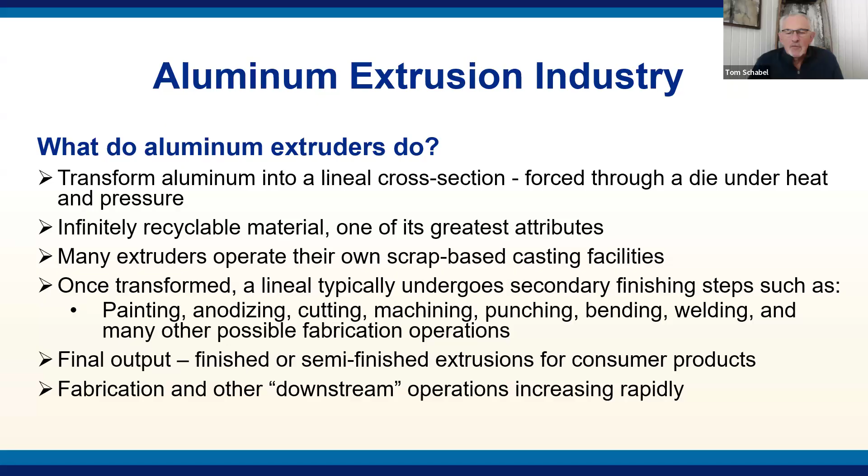Beyond extrusion, our industry does a lot of things. It takes that extrusion profile and paints it, anodizes, cuts, machines, punches, bends, and does many other fabrication operations. Our final output is a finished or semi-finished extrusion for consumer products that you see or use every day. Our industry is growing beyond just the extrusion process into many downstream operations, which increases our need for a talent pool with higher skill levels throughout our industry.

I'm going to show you a video here. If you could run that, please.

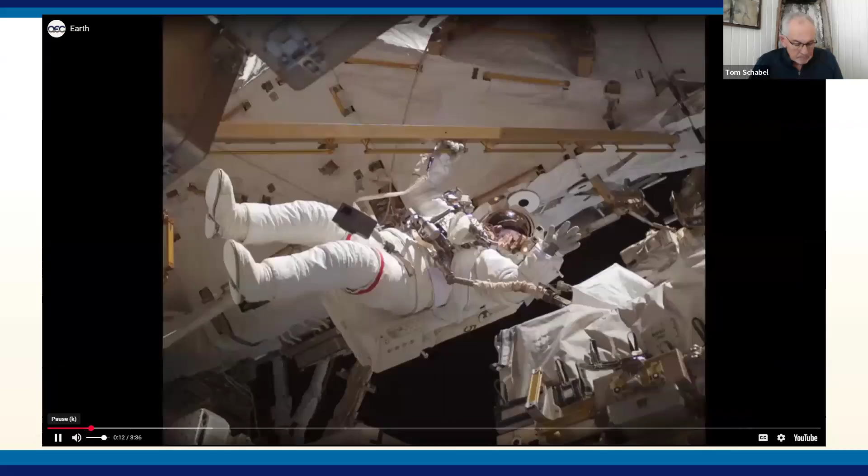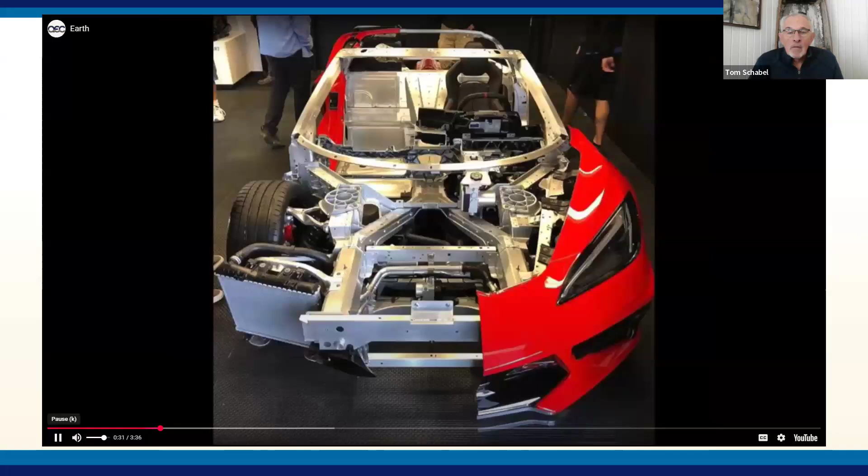You may not know anything about aluminum extrusions, but they play an important role in and out of our world. Strong, lightweight aluminum extrusions are important elements of the International Space Station, helping to provide a new vista of our world. They help us get around too, providing frames for bicycles, trucks, and trailers, and various components of cars, pickups, and SUVs. Lightweight extrusion-based battery boxes help electric vehicles go farther, and extrusion structural components reduce weight in cars and trucks, improving fuel economy and reducing their environmental impact.

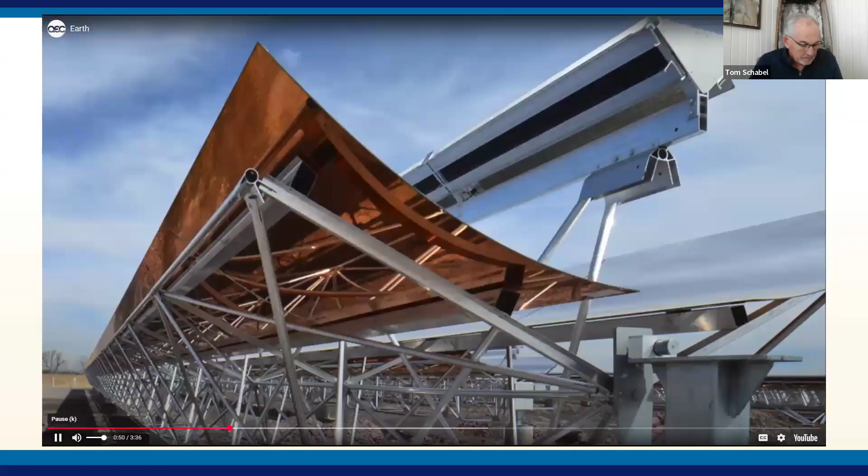Extrusion-based window framing and other building components help reduce energy consumption in buildings while admitting more natural light, further reducing energy demand. Extrusions don't just help with energy savings, they help in energy generation as well, providing lightweight mounting systems for solar power installations. You'll find extrusions in a multitude of other products you use every day: furniture, bridges, lighting and industrial equipment, sporting goods, and bleacher seating.

Extrusions are the basis for your cell phone's case. They form heat sinks that keep your laptop components cool, and they're in amplifiers that keep our concerts loud. Extrusions make so many products lighter, more efficient, or more attractive, all while being kind to our planet.

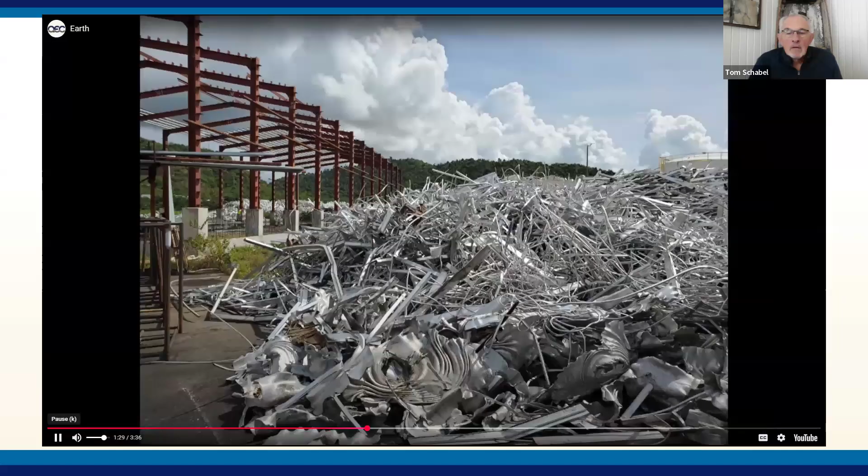Aluminum is the third most common element in Earth's crust, but most extrusions start from aluminum building scrap, old wheels, wire, and industrial scrap. This year, North American extruders will recycle nearly 4 billion pounds of aluminum scrap into new products.

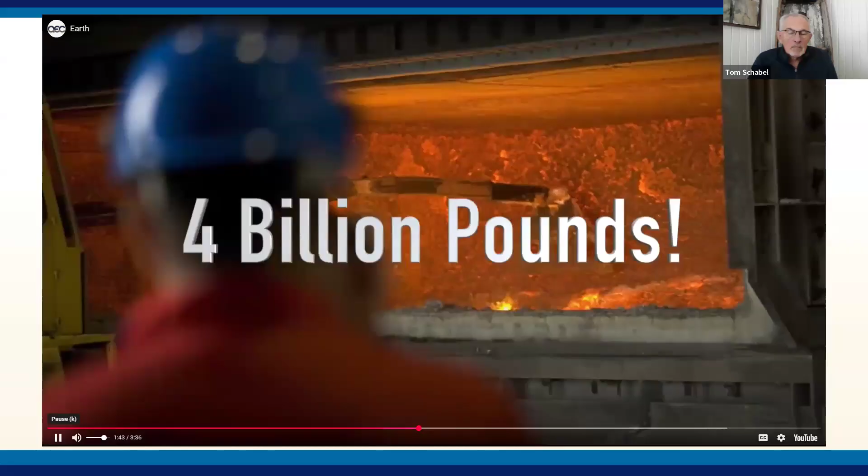That scrap gets melted and cast into logs that look like aluminum telephone poles. Those logs go to over 200 aluminum extrusion manufacturing plants in North America, where they are heated and pressed through a die, creating a shape engineered for a specific application, kind of like a Play-Doh press, but with 4,000 tons of pressure. Those shapes are cooled, straightened, and aged to give them the necessary strength and hardness.

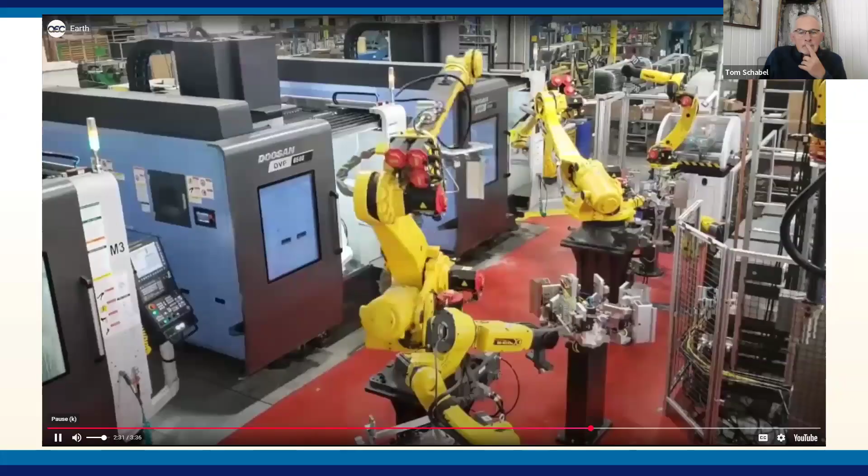Then they are cut, machined, bent, welded, painted, or anodized to produce the parts that will go to the company that will build the window or vehicle or treadmill or amplifier. Making that all happen precisely on time takes people like you to engineer the parts, verify quality, program the robots, drive the press. There are a host of good-paying jobs that require some mechanical aptitude and high school or community college training, and can lead to a rewarding career.

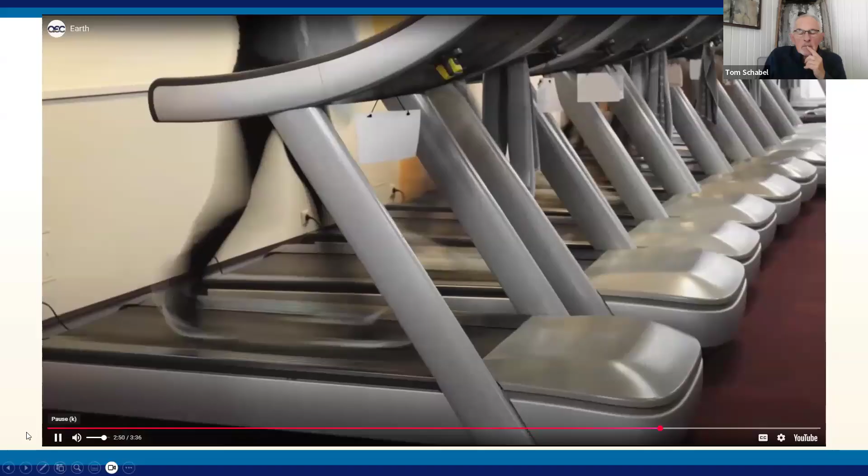Aluminum extrusions make our world better and shape meaningful and rewarding careers. To learn more about careers in our industry, go to aec.org/careers.

Thank you. You can see that we participate in lots of different products and markets. As an industry, the Aluminum Extruders Council has 70 companies with over 200 plant locations. So wherever you're looking for a job or a place to land, we probably have a member with a facility near where you want to be.

Our industry employs over 60,000 employees among our extruder companies, and when we pull in our supplier base into that, well over 200,000 employees across the US and outside. Our annual growth rate as an industry is 4% annually and growing. Certainly the automotive market is a significant growing market for us, as well as solar and a number of others. If you look at our map coming up, you'll see that our extruder members are located in 30+ states.

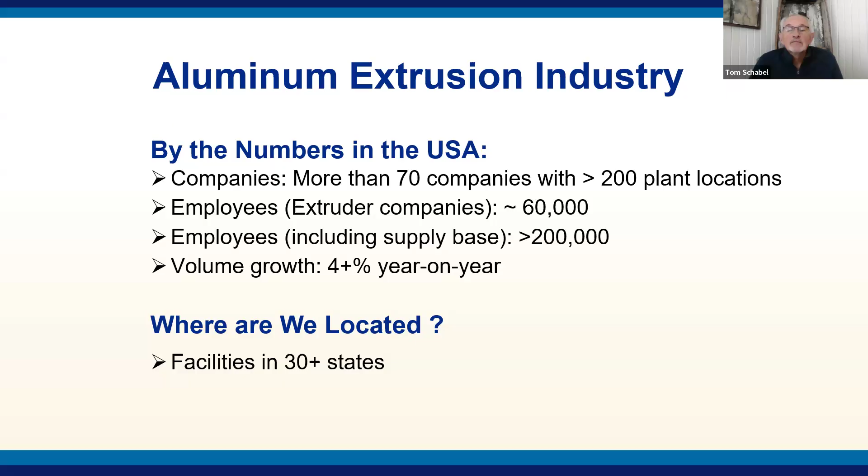We love the vets. We appreciate the service, the training, the discipline, and the leadership that is developed in each and every one of you through the military. We would love to be a place within our industry that could offer opportunities for you as you exit the military. Thank you.

Markets we serve. These are just a few of the markets we serve. The great thing about aluminum extrusion is that it's so versatile. It can be used anywhere.

Typical markets would be in building construction. Commercial buildings, high-rise curtain walls and windows, storefronts, skylights. You go into a mall and you're probably going to walk through an extruded door. Residential windows, doors, skylights, pergolas.

Certainly institutional: hospitals, schools, government. If you happen to be in a hospital going through some tests or a procedure, if you look up, you're going to see an extrusion somewhere on your CAT scan machine, MRI, or the table you're laying on.

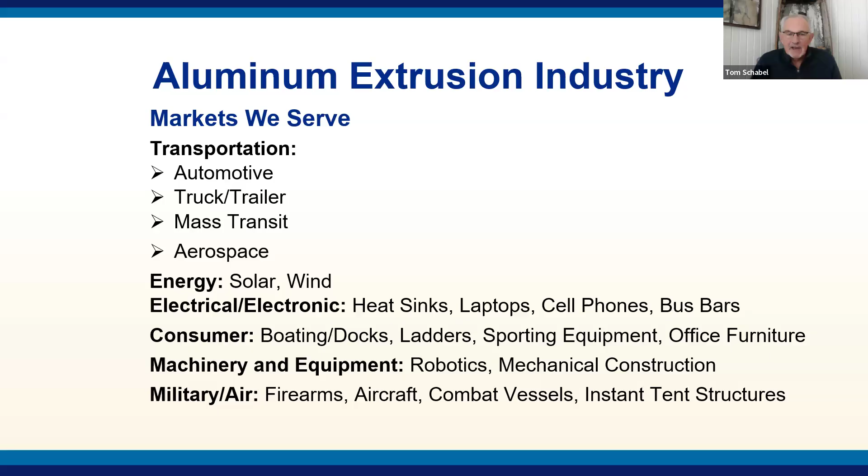So what do we need? We need people of high integrity, disciplined, and focused. But beyond that, PLC programmers and maintenance people, absolutely. Every plant represented today, I'm sure, is looking for some.

CNC programmers for machining and other downstream operations, maintenance technicians, quality managers, production workers, technicians, welders, forklift operators, logistics, leaders, purchasing, sales. We are manufacturers, but we have to support what we manufacture to the customers we serve.

So we would love, and our members would love, to talk to you about what you would like to do. What would you like to become after your years in the military? We'd love to be a part of helping you develop that.

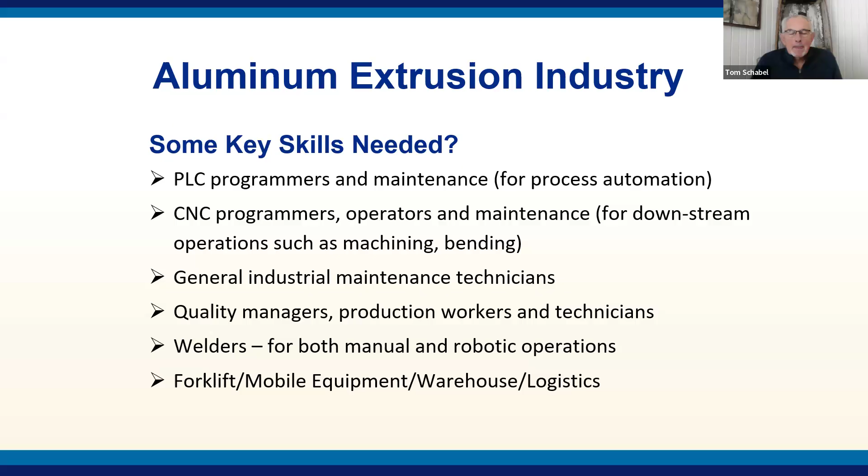We go to your shows. I was at one not too long ago where I got to meet a lot of great people who are exiting. So we'd love to have you explore what the aluminum industry has to offer. With that, I'd say thank you.

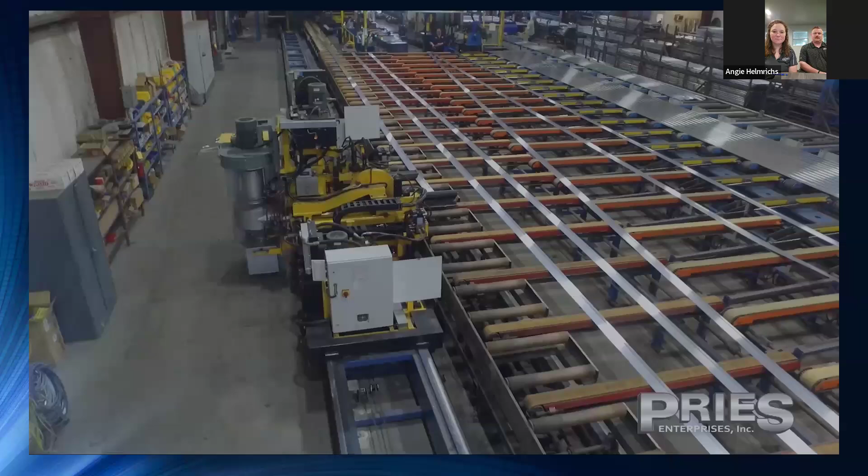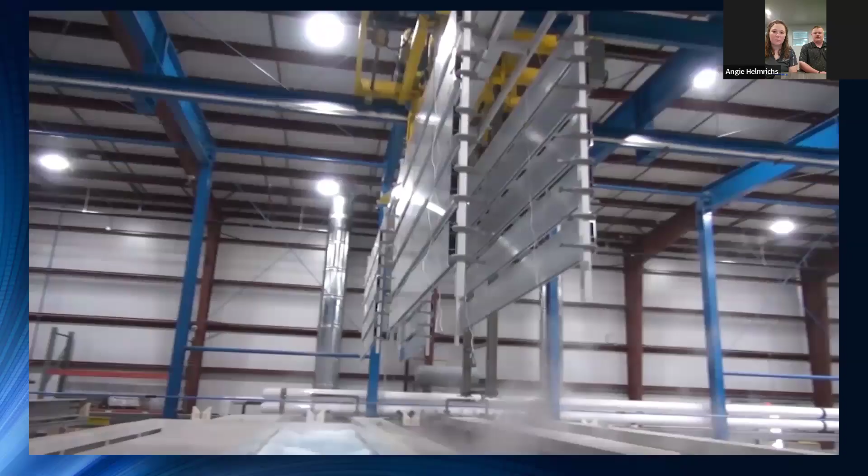This is the current video of one of our 8-inch lines. As I stated, we currently have a 7, 8, 9, and 12 inch. Our 8-inch did just go through a large upgrade. We do a lot of massive upgrades on all of our presses to improve ergonomics for our employees, increase productivity, and make our employees' jobs more enjoyable and easier.

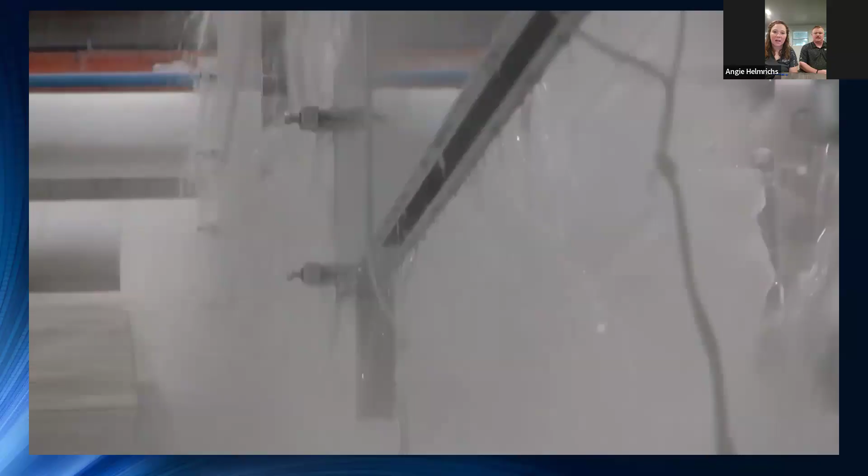This here is our anodized line that was brand new in 2019. As I stated, that's a state-of-the-art line. It was the first fully automated line in the country for anodizing, and we are pretty happy to add that to our capacity here at Prees.

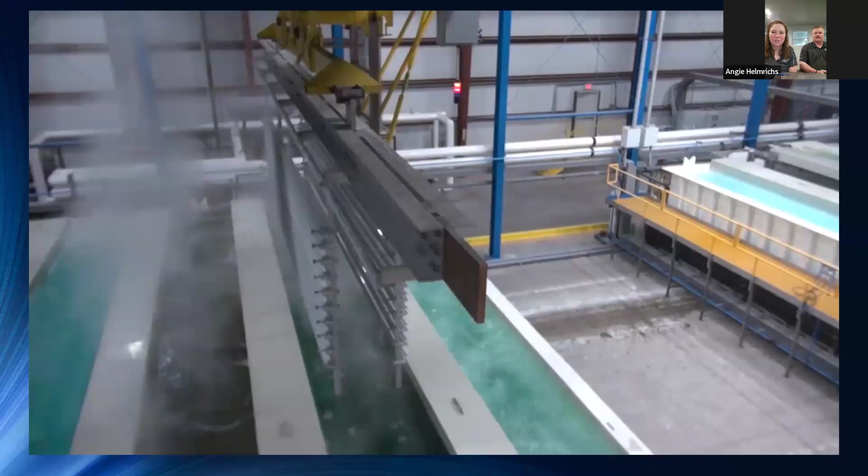As Reese had stated, he's been with the company about 7-ish years, and so have I. Since we have grown, we've added over 100 employees since I started. So we've really done a lot of advancement here at Prees.

So we do have a lot of opportunities. I know from my standpoint, not just Angie's as HR, we do a quarterly profit sharing for all employees - a quarterly bonus that comes with any sort of metrics that are met. It's an extra chunk of change in our pockets that we see each quarter.

It is nice that we take the day, we sit down, we do have food that's usually in place for us. We go through how our last quarter went with all of our numbers. It's nice to actually sit down, take a break for the day, see how everybody's doing in the different departments, and get where we're at with that quarter moving into the next.

We do have bi-weekly pay periods with a $2 attendance bonus, shift differential for second and third shift. There's 401k matching. We have health, dental, and vision insurance, long-term and short-term disability, an FSA for health and dependent care. We do a PPE reimbursement for things like steel toes.

We do have a kids back to school program that Angie runs, usually at the end of every semester, or for sure at the beginning of each year.

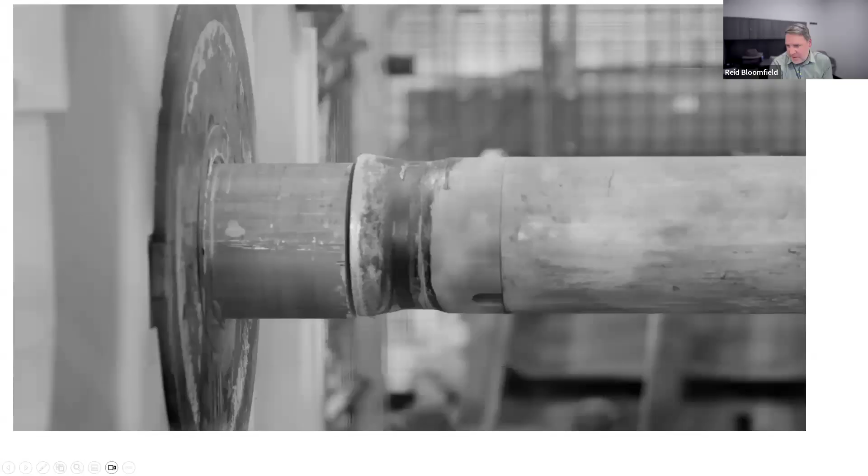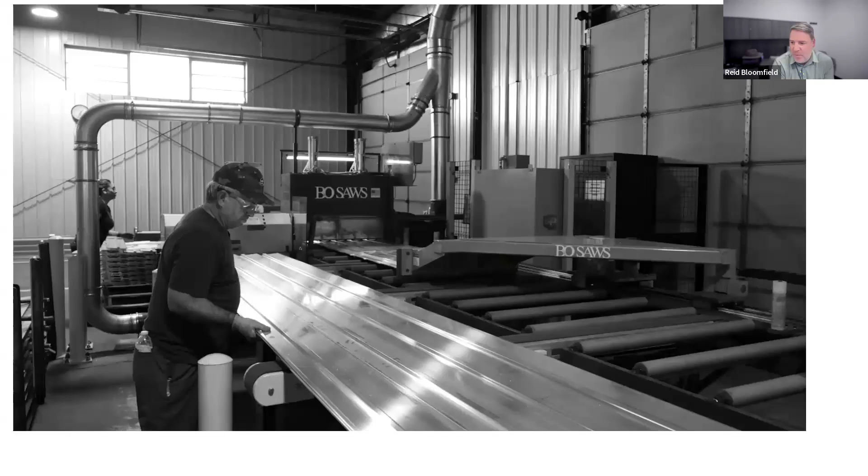Next, just a video here to show you some of our processes, very similar to Pre's and others. We do aluminum extrusion, that's where everything starts. We have 6 different presses - you'll hear the press size, whether it's 7-inch or 8-inch, that's the diameter or size of the billet that goes into the press. So we do 7, 8, and 10-inch billets.

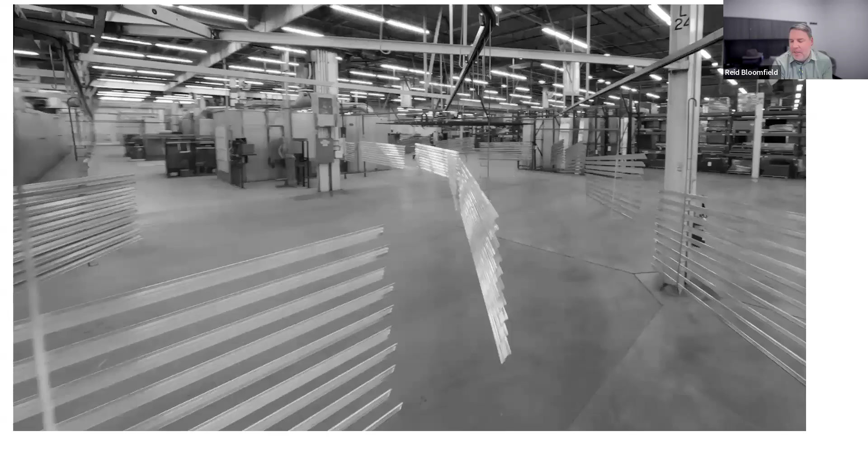We do fabricating as well, so we have stamping machines. We have a lot of finishing too. We just bought a weld robot last year, so we have a weld center. We have quality personnel that do a lot of the quality checks for us - lots of different areas.

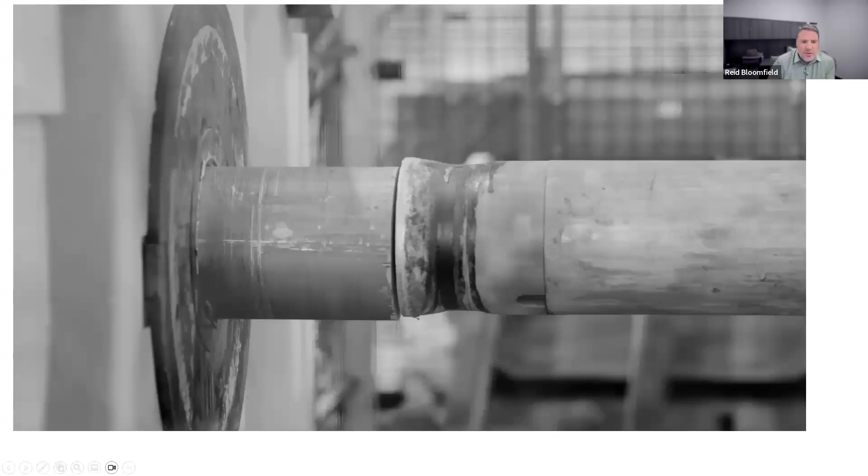Next slide. When we look at our strategic growth and what our values are, education comes a lot into that. We want to give back to our employees and make sure we're growing our employees while doing that with equity and sustainability. We look for that synergy to help each other grow, and then look for opportunities for future growth as well in our employees.

Next slide, giving back to our community - we have an inventors lab. This is in Genoa, in the new facility we purchased, the 70,000 square foot building that had some office space in front. We went to the local library to start this STEM club, and the turnout was so massive during the first showing that it was packed. So we offered to have our office space remodeled in that building, and now every month we have our inventors lab together partnering with the library.

We use that space, we have kids come in and they have a great time. We have a different topic every month, but it's very hands-on, just to show the kids what manufacturing is about and try to get them into that manufacturing mindset.

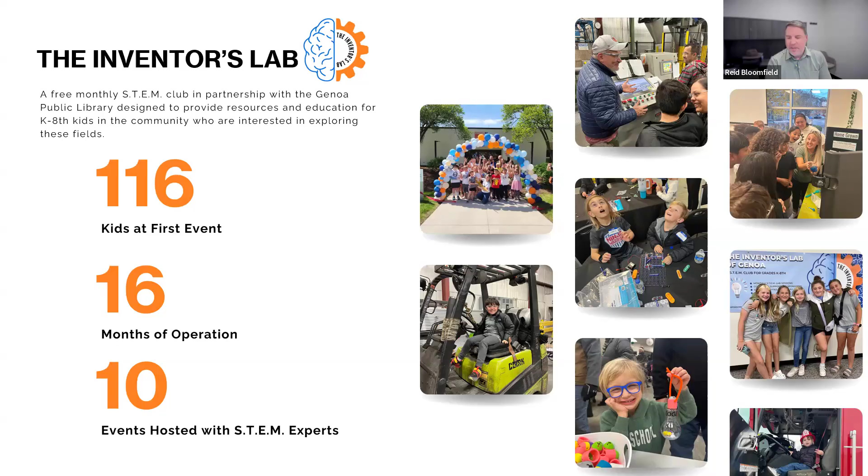Some of the opportunities that we have - again, we do extrusion, and when we talk about downstream, extrusion for us is the first process, so everything after that is downstream. We like to extrude, and a lot of what we do is custom made, so we have CNC operators - probably 50 CNC machines. We do packing and assembly.

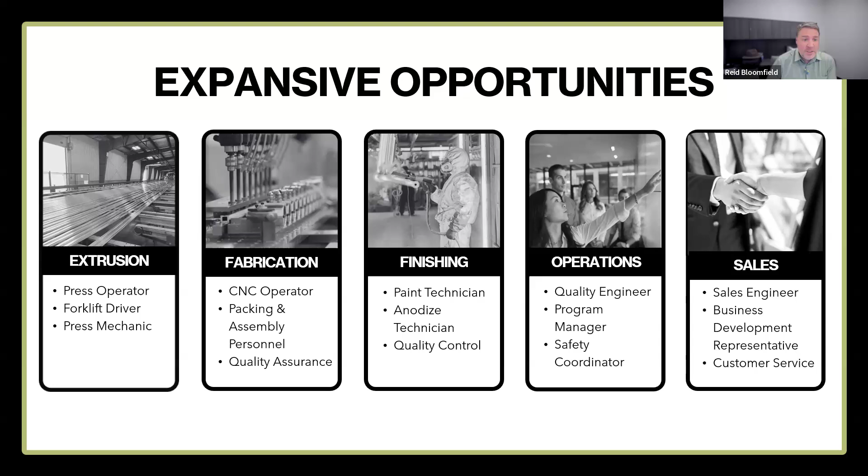We have quality as well, and from a finishing standpoint we have 3 paint lines and 2 anodized lines. From an operations standpoint, we need support from safety coordinators, program managers, quality engineers, the sales side, the whole business development side, the quoting - we do everything internally. So the more support we can have for all these different areas makes a big difference to be able to support our customers. And then Jason, if you want to take over and talk about transferring your skills and maybe your military service as well.

All right, my name is Jason. I've been with Custom Aluminum for 12 years now. I've been in 3 different roles - I started in quality, then I moved to production control, and now I am the finishing manager. So I'm in charge of a paint line and our anodized line out here in Genoa.

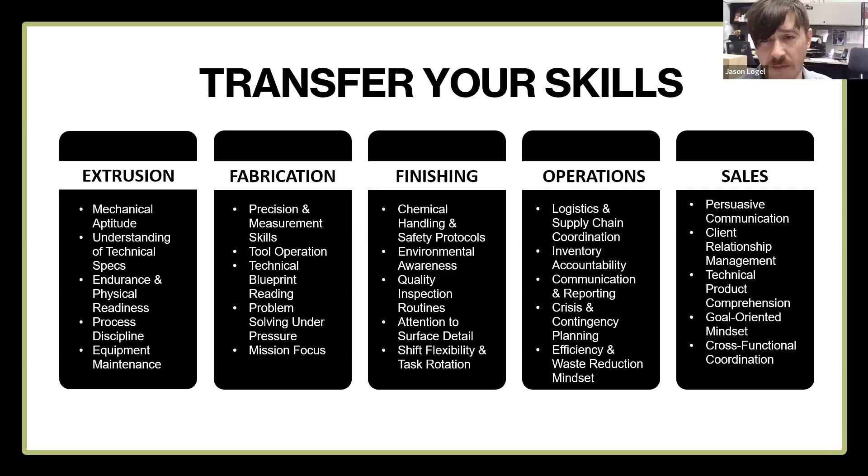Awesome, thanks Jason. So as Jason said, we want you to start here and then grow here. And we have a lot of different range of possibilities, so whether it's maybe on the quality side, or maybe it's CNC programming, or whatever that gamut may be, we want to find what you're good at and then get you in that spot.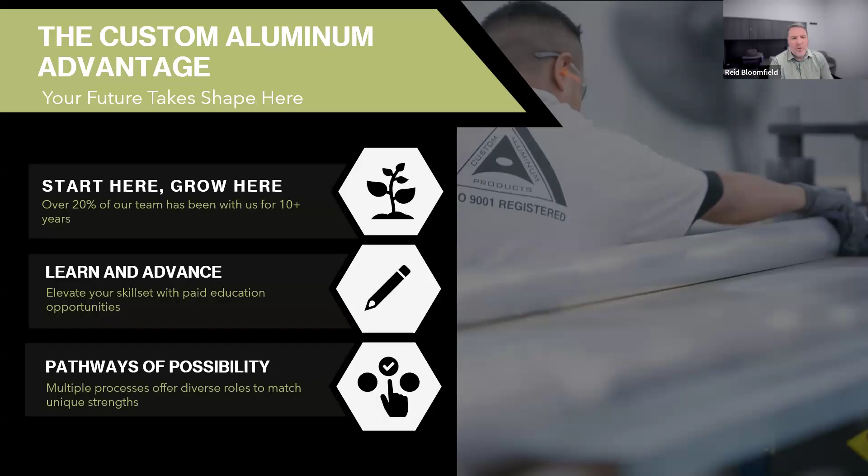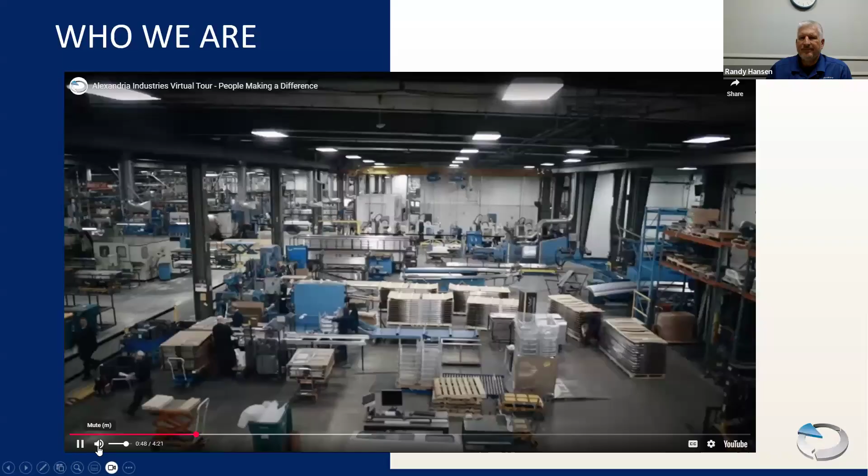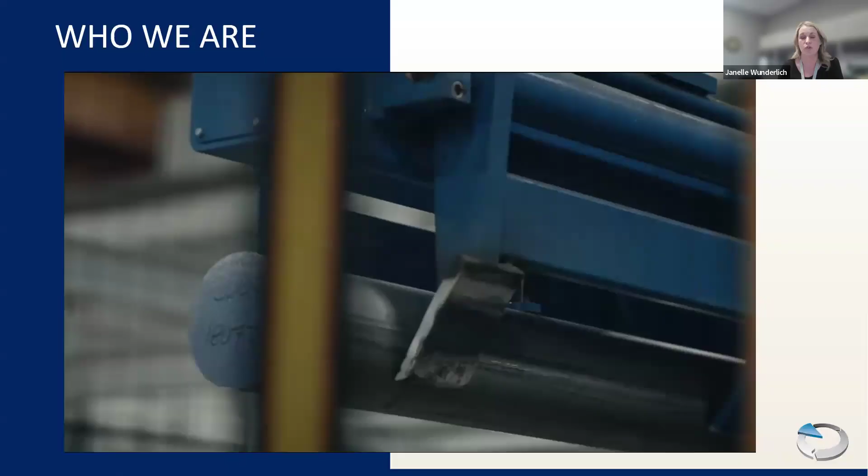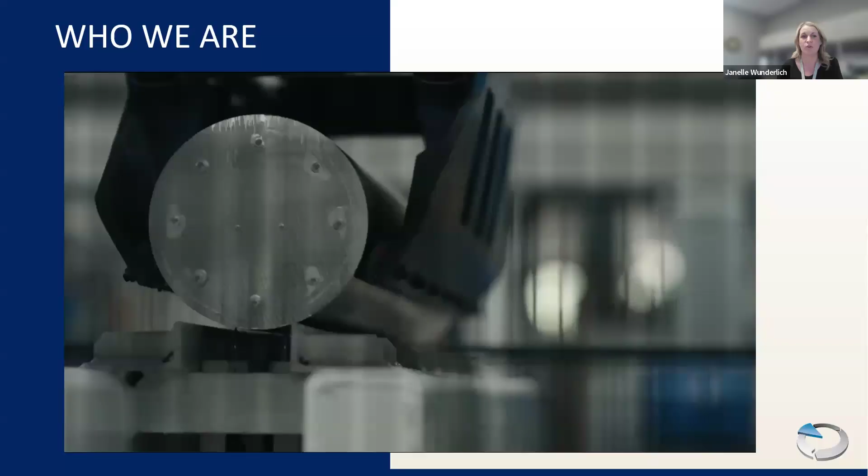Alexandria Industries creates custom manufacturing solutions to make the components that go into products people see and use every day. This includes everything from recreation vehicles, watercraft, military equipment, medical products, and renewable energy systems, among countless others. With the right combination of advanced manufacturing technology, engineering services, market expertise, industry certification, and a skilled workforce, we help our customers create product development solutions that are second to none.

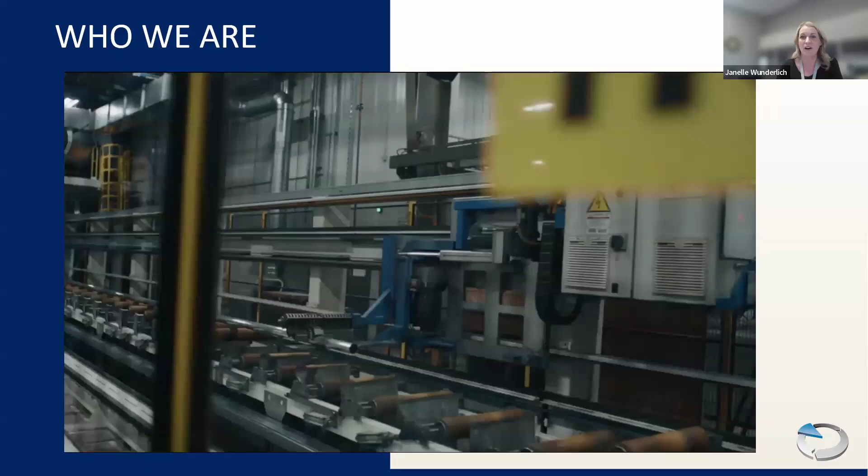Alexandria Industries has 4 locations, 2 in Alexandria, Minnesota, 1 in Wheaton, Minnesota, and 1 in Indianapolis, Indiana. We proudly employ 400 employees, with about 10% having a military background. We're looking for employees that like to work hard and have fun doing it. We have highly competitive pay and benefits.

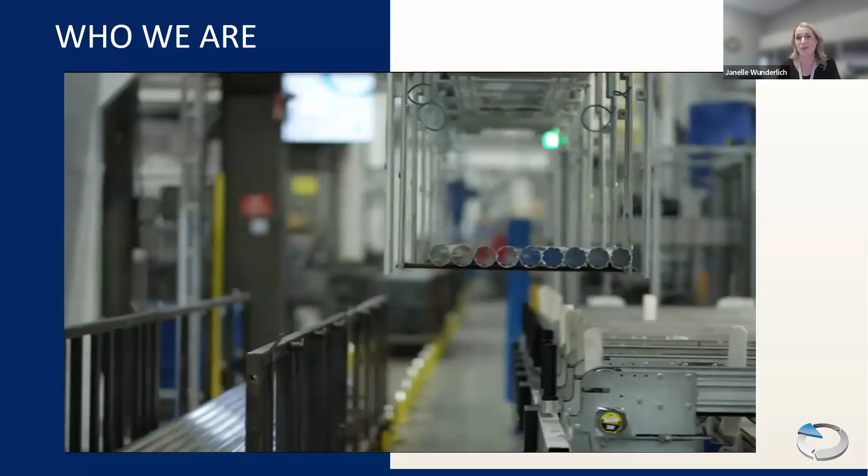With running our business 24/7, we have a variety of shifts available: days, afternoons, nights, weekdays, weekends. 8-hour shifts, 10-hour shifts, and 12-hour shifts are all available. Our applicants can be highly skilled or even have no manufacturing experience. We have a highly detailed training process for our new team members to make them successful here at Alexandria Industries.

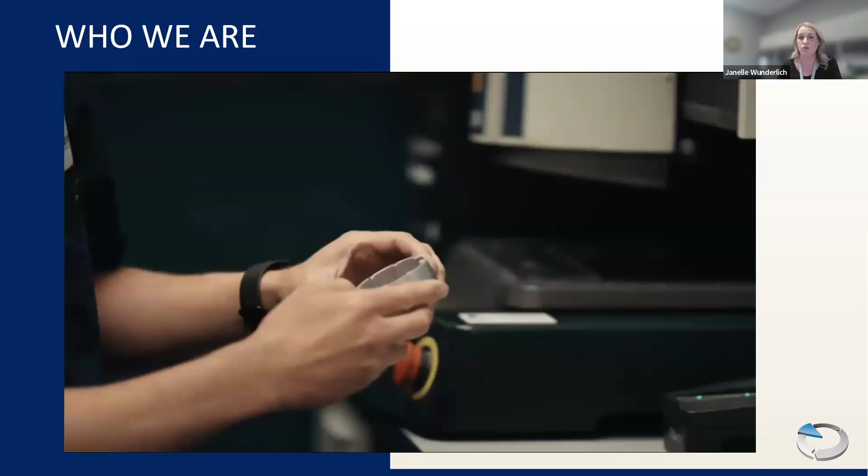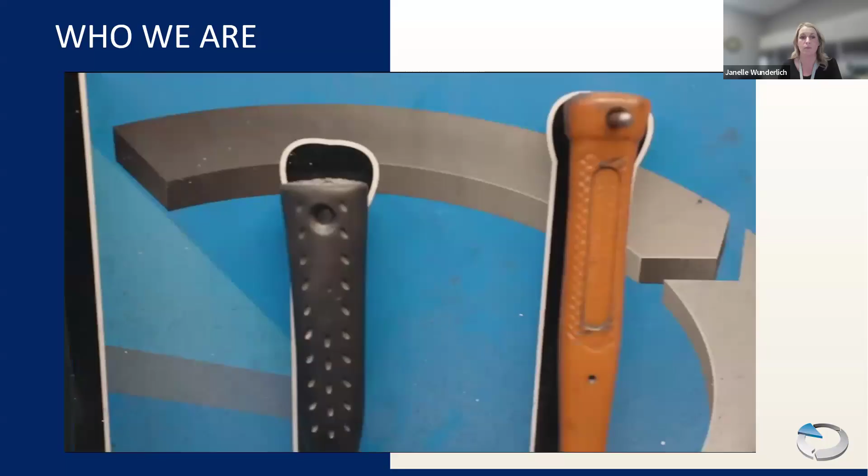We have openings in several departments, including fabrication, extrusion, maintenance, and machine shop. We also have openings in leadership positions across multiple shifts. Please check out our website to see what positions are available across our Minnesota locations and in the Indianapolis location. We are people making a difference.

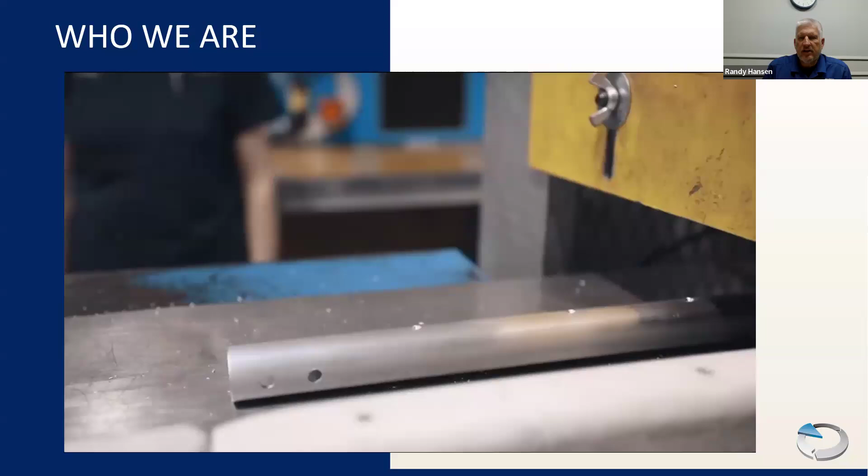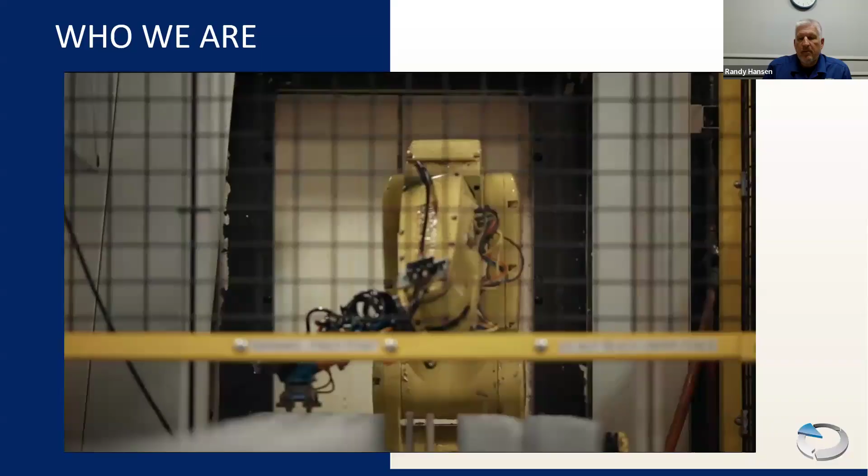This is not just a part of our purpose statement, it's who we are. But what exactly does that mean? It means our employees live with a passion, the passion for others. That includes our coworkers, customers, suppliers, and communities. They are driven to do things for others. If there's a need, we're on it. It makes us an employer of choice, a unique supplier, and a competitor that our competition keeps a close eye on.

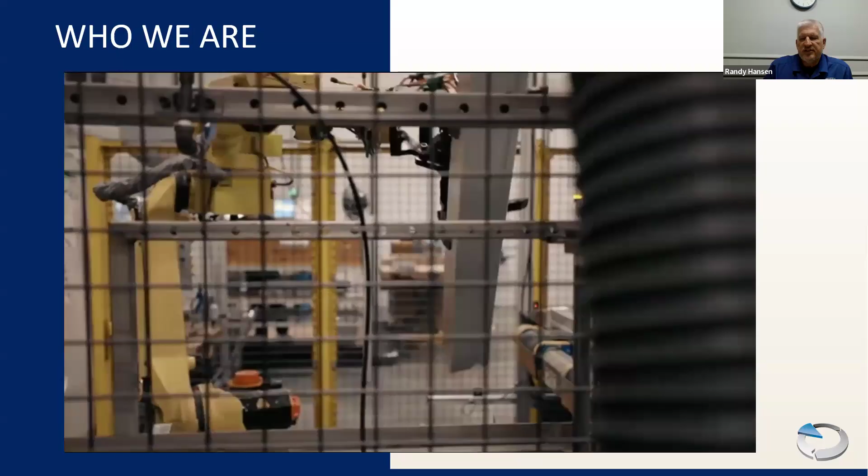We look for ways to do life together. At Alexandria Industries, we celebrate time together that fosters camaraderie and unity. From shared meals that bring everyone together to engaging games that spark friendly competition, we create memorable experiences. We also have fishing leagues that we get together in the summer on. We'll go tubing in the winter, or maybe some go-kart racing. We have team sporting events, and last but not least, some of us will get together and go for an evening motorcycle ride to grab a burger together.

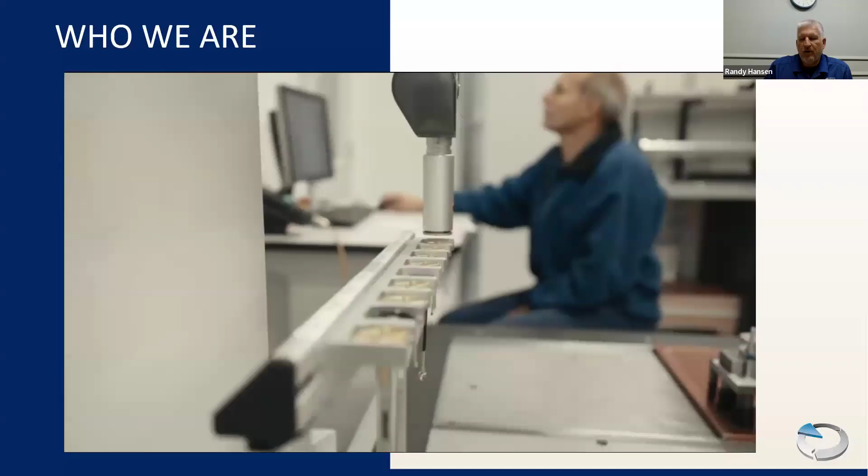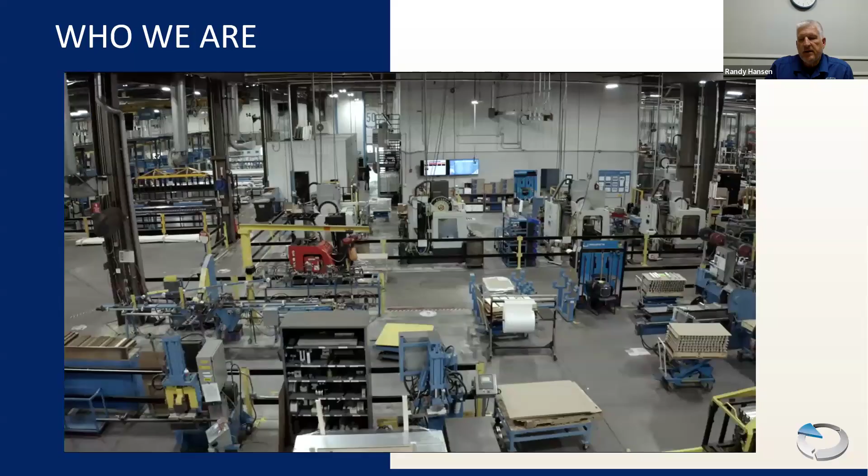We see your strengths in leadership, guiding teams with vision and integrity, in teamwork, collaborating effectively to achieve common goals, in problem solving, tackling challenges with innovative solutions, in discipline, maintaining focus and order in all tasks, and last but not least, attention to detail, ensuring precision in every action. All of these are key skills for success at Alexandria Industries.

Alexandria is located in the heart of Lake Country in west central Minnesota. It's a perfect balance of size, which offers quiet and quaint relaxation, while possessing some of the best shopping, dining, and overnight accommodations that you can imagine. While all the lakes and woods provide great outdoor opportunities, you can also find plenty of fun around many of our attractions. Alexandria has a thriving downtown district, excellent trails, plenty of arts, museums, parks, wineries, and breweries. You'll find endless outdoor opportunities for biking, hiking, fishing, snowmobiling, skiing, boating, and much more.

But Alexandria is more than just pretty scenery. We have a strong sense of community here. You'll find friendly faces at our local shops and restaurants, and there are always community events that bring people together. Our downtown area is thriving with unique boutiques, cozy coffee shops, and delicious eateries, the kind of place where you can become a regular and feel truly connected.

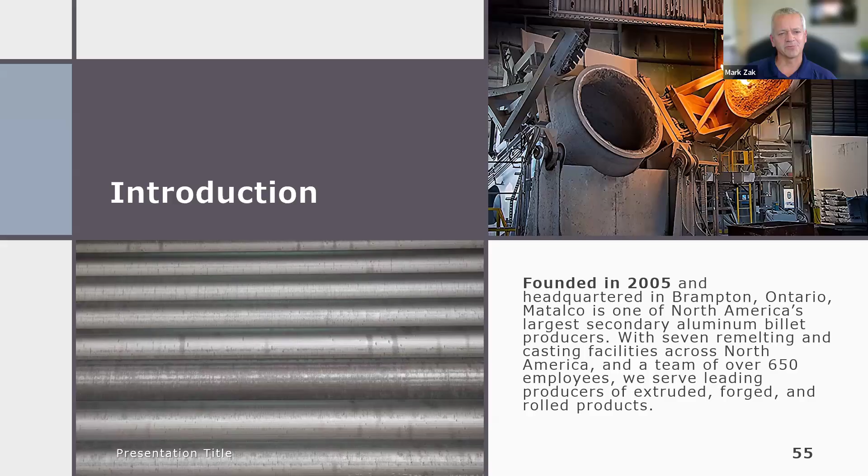Next slide. So being the largest secondary scrap producer or aluminum producer, what does that mean? That means we take, as a secondary, scrap aluminum from building, construction, auto rims. We take all that scrap and utilize it, melt it down, and turn it into either a billet - a round billet that looks like a telephone pole - or a slab, a giant slab product of solid aluminum. So that's what it means from a secondary standpoint. Primary, a little further upstream in aluminum, is where they actually mine the aluminum out of the ground - they mine bauxite and then refine it and turn it into aluminum. That would be considered primary.

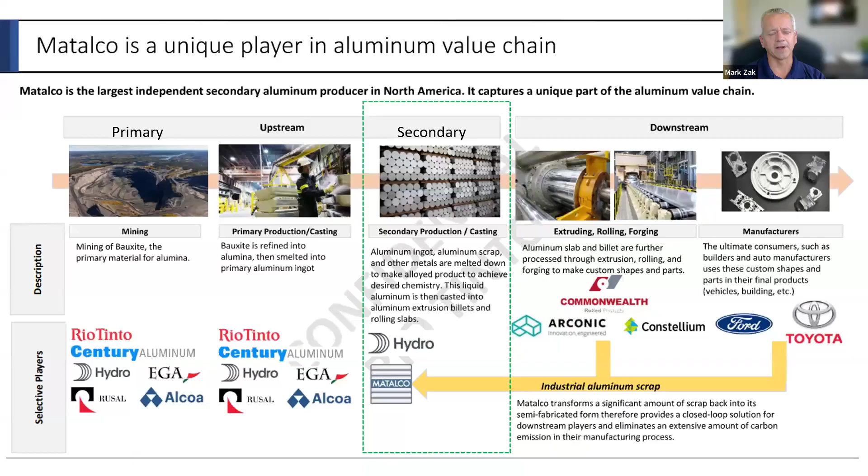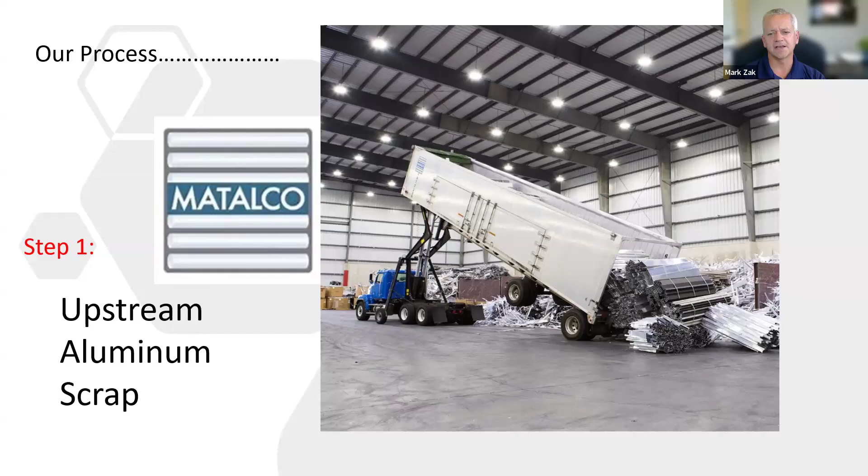Next slide. So where do we start? In each one of our plants, the first step in the process is we have scrap brought in, and it is separated based on the type of scrap that it is, so it's segregated. It's put into a furnace or a melter that melts that scrap down into a liquid. Then we add alloys, what we call sweeteners, to get the chemistry to the exact place it needs to be.

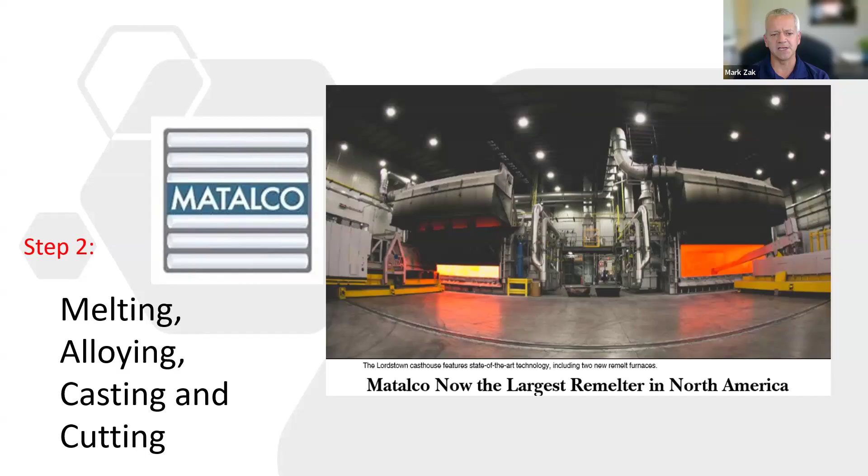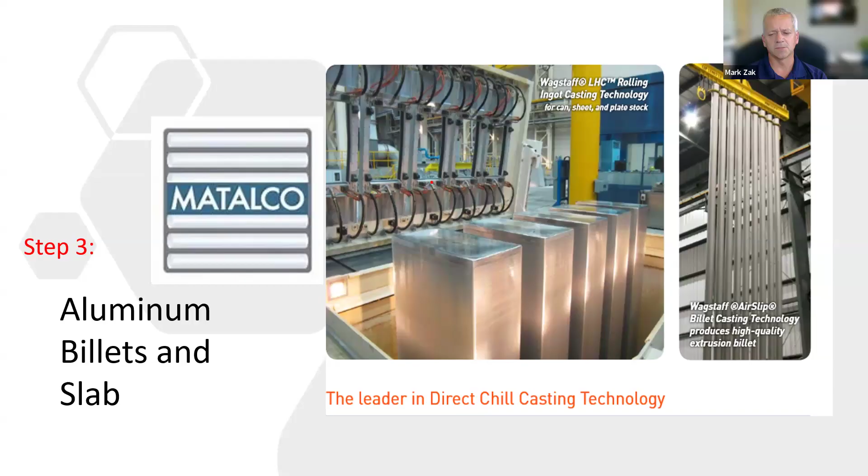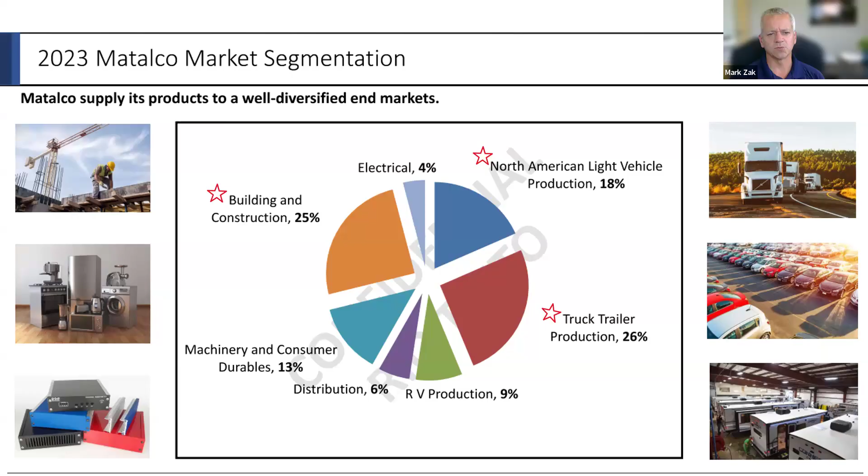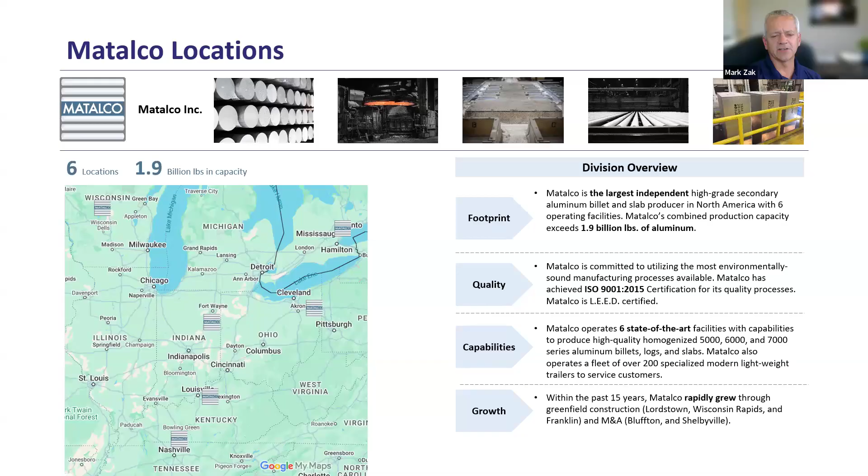We've had massive growth over the past 15 years, which we'll see here in a second. Next slide. Our first facility started in Brampton - we celebrate 20 years this year - up in Ontario in 2005, we built that facility. In 2016, we built a facility in Lordstown, Ohio, near Cleveland. And then in 2018, we acquired an existing business in Bluffton, Indiana, near Fort Wayne.

Next slide. In 2020, we constructed a facility in Wisconsin Rapids, Wisconsin. In 2021, we acquired an existing business in Shelbyville, Kentucky. And then we revamped an existing paper mill in Franklin, Kentucky, and turned it into a slab producing facility for Matalco. Next slide.

In 2023, we formed a joint venture with Rio Tinto. Rio Tinto is the second largest metal and mining company in the world. Their focus is on primary aluminum - as I mentioned earlier, they are the ones that actually do the mining of bauxite to make aluminum. So they partnered now with us as the largest secondary aluminum producer to make it a pretty good tag team for aluminum supply in North America. Next slide.

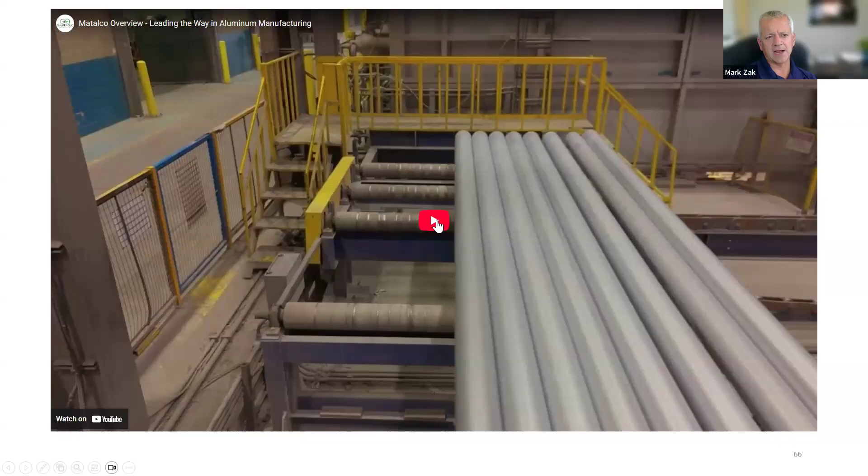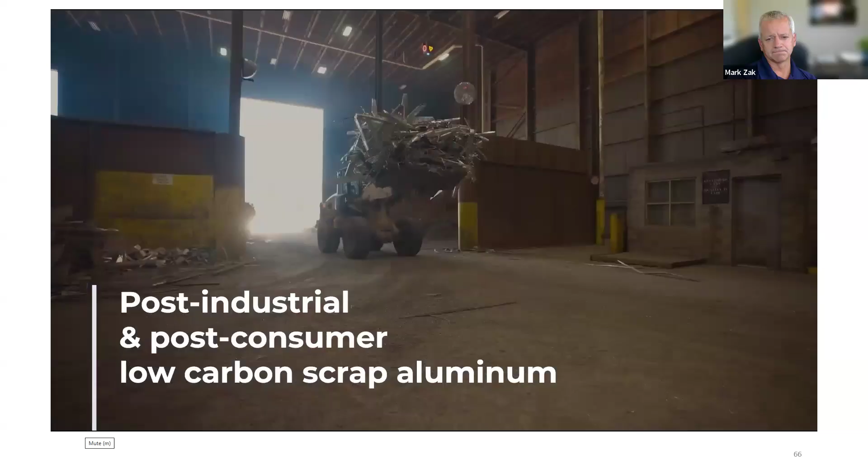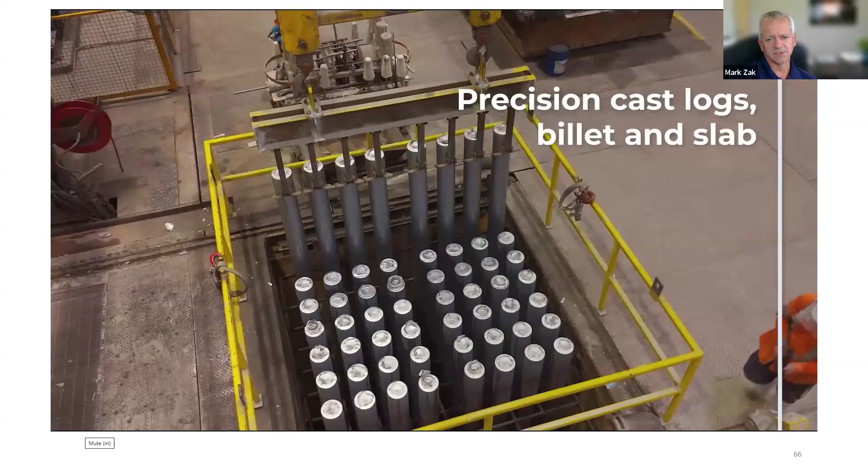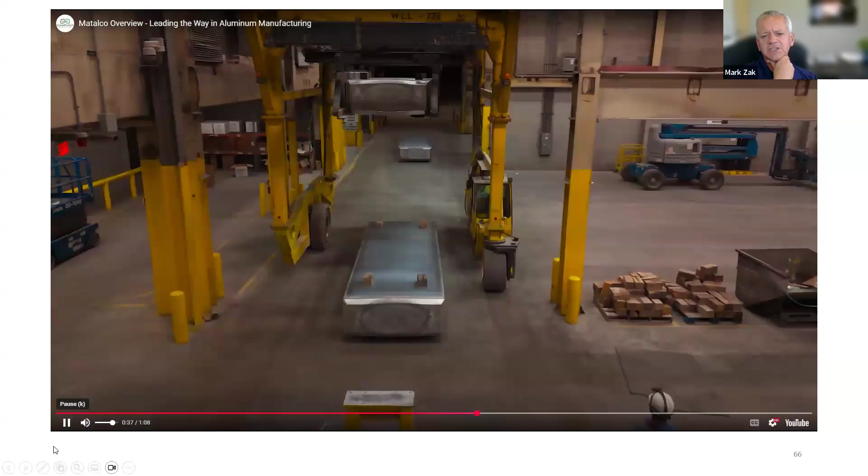With scraps coming into the facility, they get loaded into the furnace, the operating furnace. Roll it down - this is a casting table. Billets being pulled out after they finish, take down on the racks. A lot of automation involved in our process.